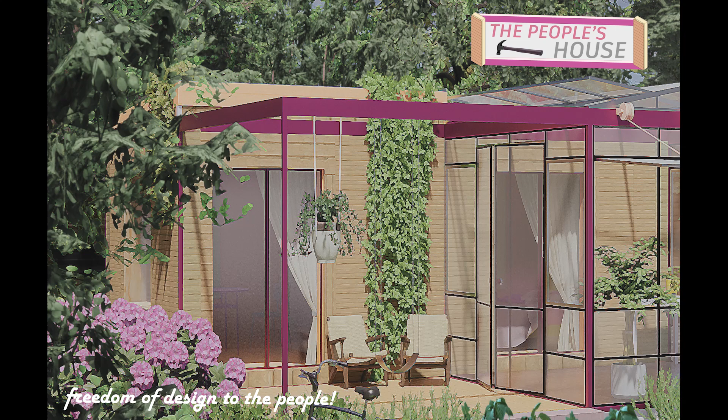Hey there, my name's Cameron Reid, and this is the People's House and Garden, a new building product for black people across America. We recognized a problem in Portland, Oregon.

Black wealth isn't prospering like it should. A history of redlining, blight ordinances, and disinvestment led to excessive gentrification in black neighborhoods. With new construction, the black community is secondary to return on investment. Construction is disruptive and destructive.

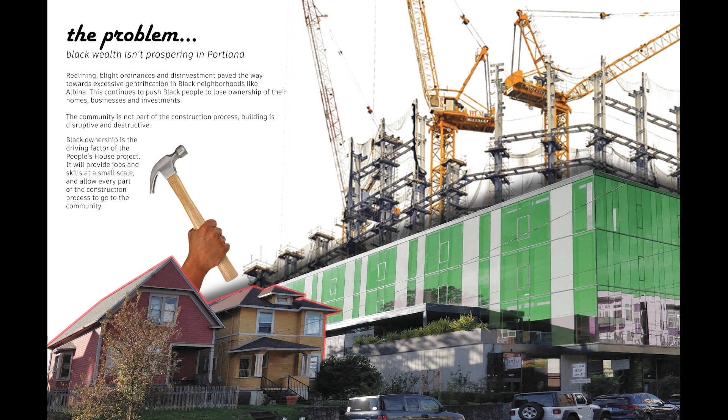We hope to bring ownership back to the black community with the People's House. It'll provide jobs and teach skills at a small scale, allowing every part of the construction process to go through community. Our vision started as a simple kit of parts for housing and gardening, offering spaces to coexist with nature and connect with its wealth and prosperity.

Modularity would give people freedom to expand their spaces over time. As it developed, it became a whole new vernacular, which raises black voices towards community-driven designs. We wanted this to be a building strategy that's malleable, inexpensive, and creative.

The first project we designed is for Charlie Days. He lives in Albina and wanted to build his own house, but he couldn't find an affordable or accessible way to do it. He wanted to use the People's House kit of parts to shape his home with his own hands. He's going to share a bit of his story.

I received a catalog where I got to choose the layout of my house and what parts I would need for it. I chose 2 rooms and a greenhouse to put on my grandmother's land. I placed my order, and a truck was set to arrive in 2 weeks.

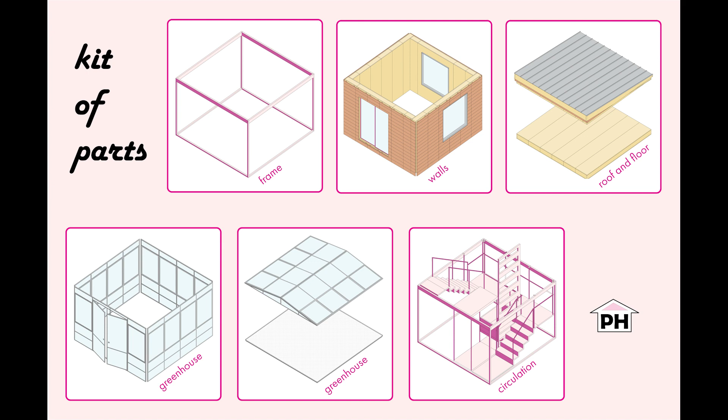The People's House partners with local black builders to pour the foundation. This was the only part I couldn't do myself. I met up with the builders and we spent a day digging holes and flattening the earth. They taught me how to pour concrete, and I learned how to go about setting the floors on the posts.

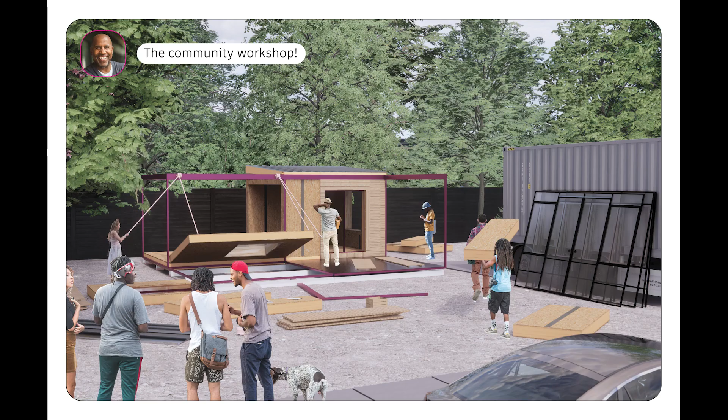Once the concrete had dried, I was ready to assemble. The truck arrived with my parts, and they told me it should take about 4 weeks to put it together. I decided to organize a building workshop so friends and kids in my neighborhood could build with me. We pulled out the instructions and got to work.

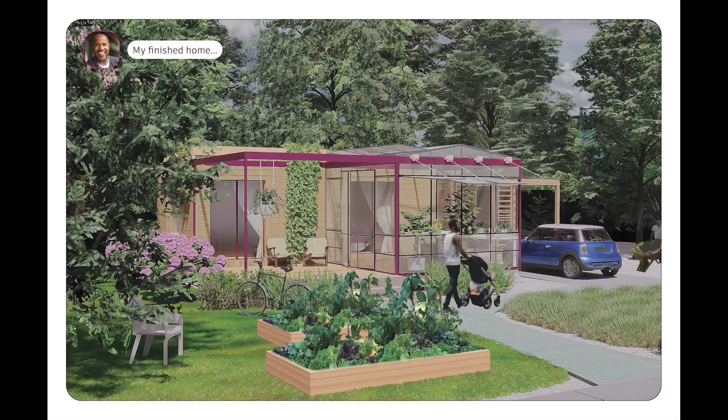It turns out that the folks in the neighborhood were very eager to learn some building skills. One young girl told me she'd always dreamt of building a life-size Lego set, and her dream had finally come true. The house was easy and understandable to build, and after I got the okay from the People's House advisor, all I had to do was some landscaping to make it just right.

I've now lived in the house for almost a year. My greenhouse is full of beautiful plants and vegetables, which I share with the neighbors who helped me build it. It's quite empowering to be such a large part in something as important as building your own house, so I really hope that more people's houses will pop up in black neighborhoods across the country.

This is a page from the catalog that we gave Charlie. It shows you how to assemble the main parts of a housing module. A steel frame is the main building block, which the walls, roofs, and floors sit inside. The housing pieces are made of structural insulated panels and 2x8 pieces. This makes them easy for a few people to lift and assemble. During assembly, small pulleys attach to the frame to help tilt the walls into place.

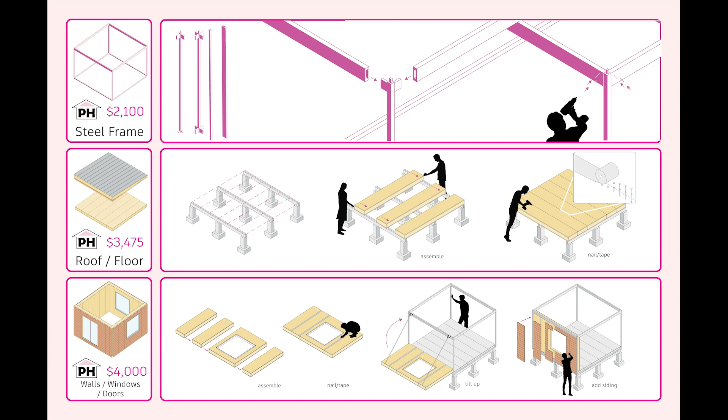This page describes the construction of greenhouse and circulation modules. Greenhouses are made of polycarbonate panels, with operable windows controlled by the small pulleys. Shading rolls are installed after the walls are in place. Circulation happens in another module.

A stair is built in 3 pieces, with enough room in the center for an ADA lift.

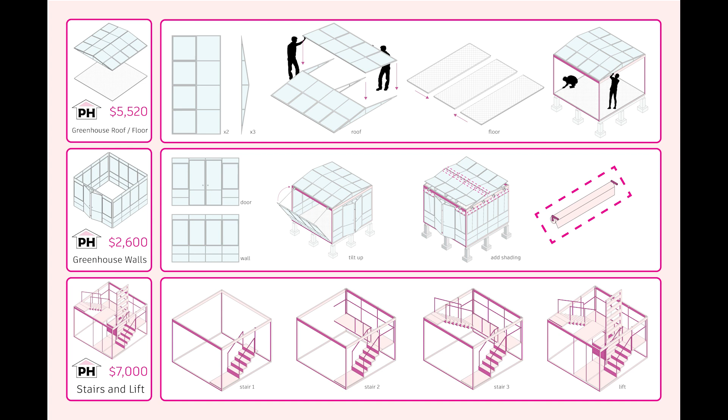The SIP walls are clad with cedar siding with a drainage plane. Wherever a greenhouse roof joins the SIP roofs, there is a gap for water to travel into a small gutter, which is caught and used to water plants. The water travels over the fascia, which is covered with a waterproof coating.

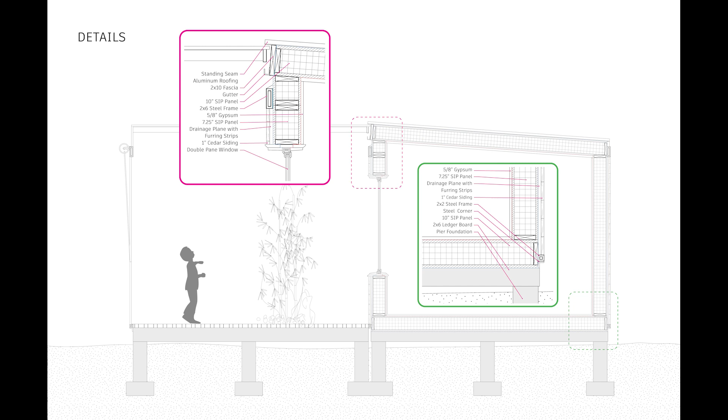The foundation is pier and beam, and the SIP floors sit on 2x6 ledger boards. The steel frame rests on steel corners, which connect both to the foundation and the floor panels.

As far as conditioning goes, the People's House uses a mostly passive system. The greenhouse serves to condition the air that then travels in or out of the housing modules.

Ventilation schedules optimize the louvers in the roof and walls to open or close depending on the outside temperature. Low-energy ceiling fans circulate the air, and operable roll shading keeps direct sunlight out in warmer months. Within the homes, ductless heat pumps are in place to give occupants control over their temperature.

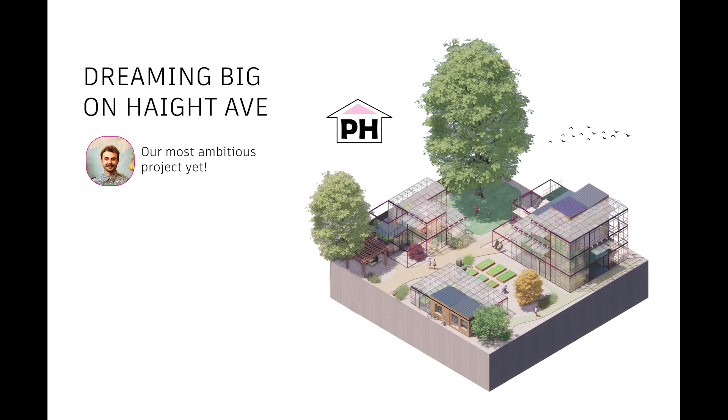We have plans in the works for a new proof-of-concept site. 4504 North Haight Avenue is a site with a history of black farming and family. It is located in Portland's Albina district, a perfect place to create People's House jobs and reinvest in the neighborhood.

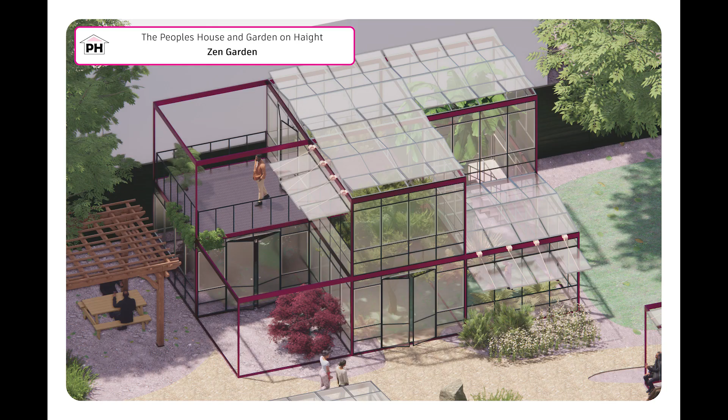It is 3 structures, each serving Albina in a different way. The buildings can grow over time, demonstrating the longevity and versatility of the system. This is our biggest project yet, and we hope it can pave the way for more community-driven projects throughout chocolate cities in America. The first of 3 structures is a Zen garden.

Benches, ponds, and tropical plants make a fun, oxygen-filled environment. It is a welcoming space for anyone who needs a place to relax and enjoy time surrounded by nature. Partially enclosed, it provides shelter from rain in the winter months, making it especially enjoyable year-round.

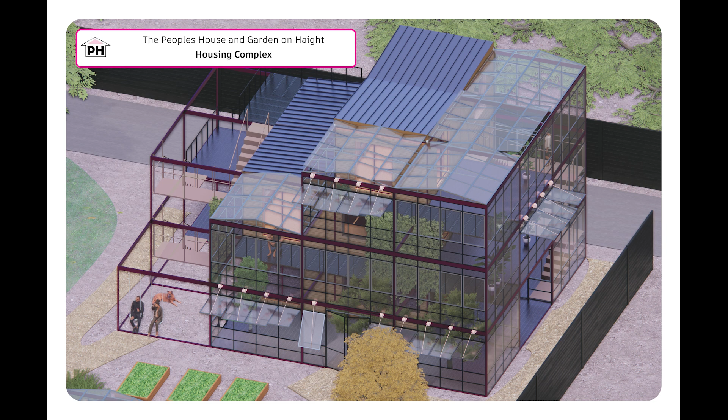The second structure is a housing complex. It's set on the private side of the site, next to an alley. Because of its size, it would have nice views west over Haight Avenue.

The complex would have 3 floors of living space, as well as a private greenhouse for the residents. It could support 3 to 8 people as it stands, but it could expand with more module pieces as families grow. The third structure is a street market.

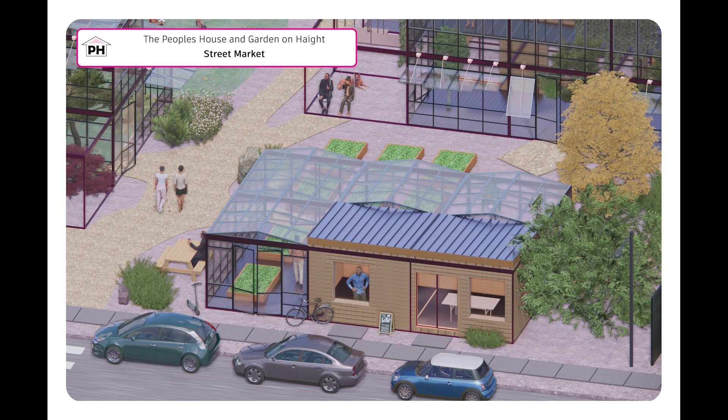Right off of Haight Avenue, it would be the face of the project. Community members or housing complex residents would manage the building, welcoming people to its storefront window. The street market would create space to generate wealth through cooking, sharing food, and selling produce to the community.

The garden beds would be rentable by community members, who would also have access to the food storage and kitchen spaces inside.

These projects showed us that there is affordable potential in the People's House. Charlie's house cost us $57,000 and helped to develop the Haight Avenue project, which we estimate to cost around $320,000.